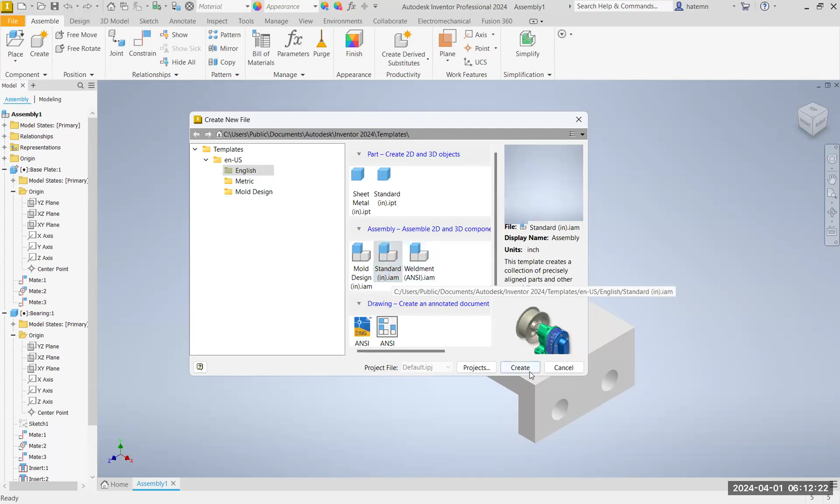So let's get started. The first thing you want to do is make sure you're in the correct template, and then you're going to choose Standard IAM, and this is an assembly.

So we'll select Create, and the first thing you'll notice is there's nothing on the screen. So what we're going to do is we created these parts earlier, and we're now going to take these individual parts and assemble them together.

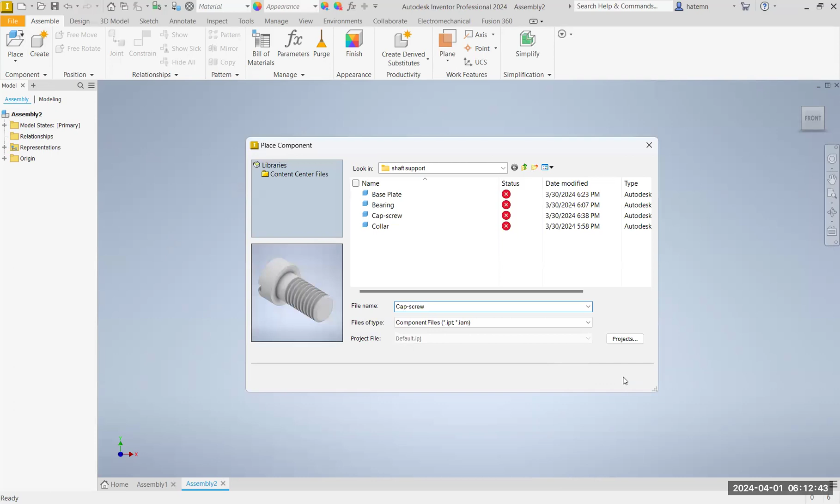So let's go ahead and start with our first item. The first thing that we want to select, actually let's hit cancel here, is when we're looking at our assembly, this is our base item. So this is the first thing that we're going to put into our drawing.

So let's go ahead and choose Place, and let's try to find that base plate. Notice when I select it, you'll see an image here. We're going to go ahead and hit Open, and I'm going to change it to isometric so that we can see our part as we place it.

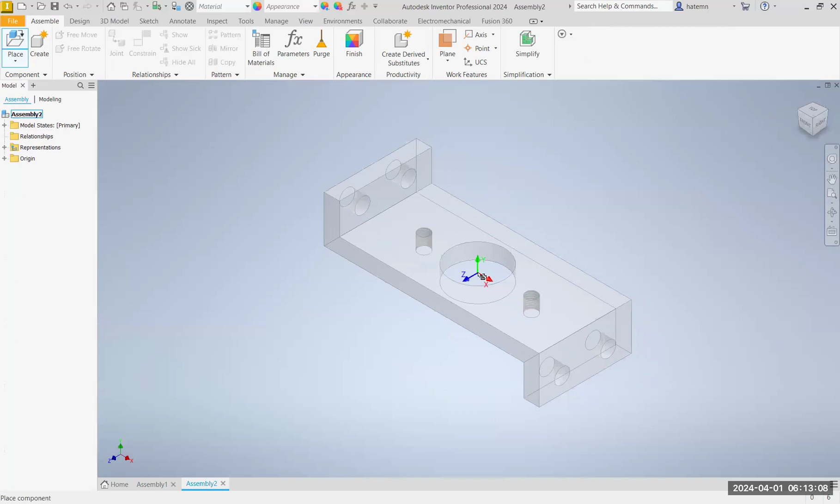The first thing that you want to do is right click, and you're going to place it grounded at origin. Notice I could place multiple items. I'm just going to hit right click and hit OK.

Now, when this is grounded, I want you to notice that it cannot move. It is set in place. And if I come over here to my base plate and right click, notice there's a check by Grounded, which means that this is the base feature. It's grounded in this location, so it's not going to have any degrees of freedom. Degrees of freedom are going to make sense here in a moment.

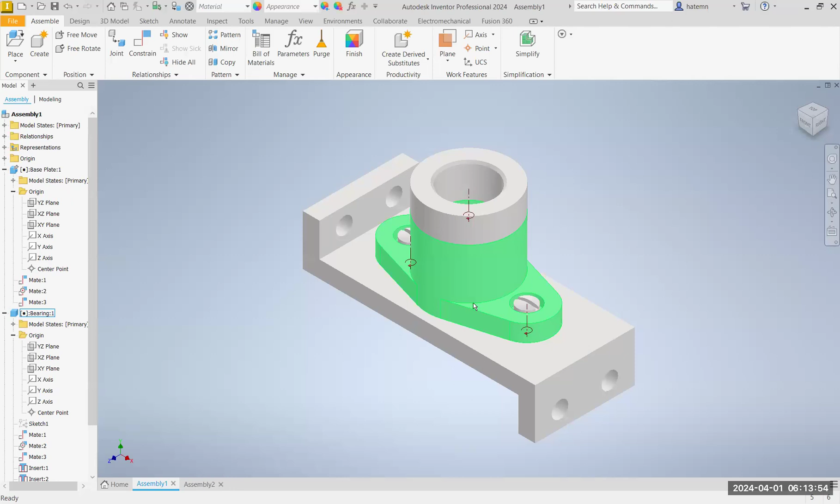So the next piece that we're going to go ahead and place when we're looking at this is this bearing here. Because that's the next piece that would logically be set on this base plate before we would put the collar and obviously the cap screws.

So we're going to go back to this assembly. We're going to go to Place, and we're going to select our bearing. And again, you'll see it right here, and select Open.

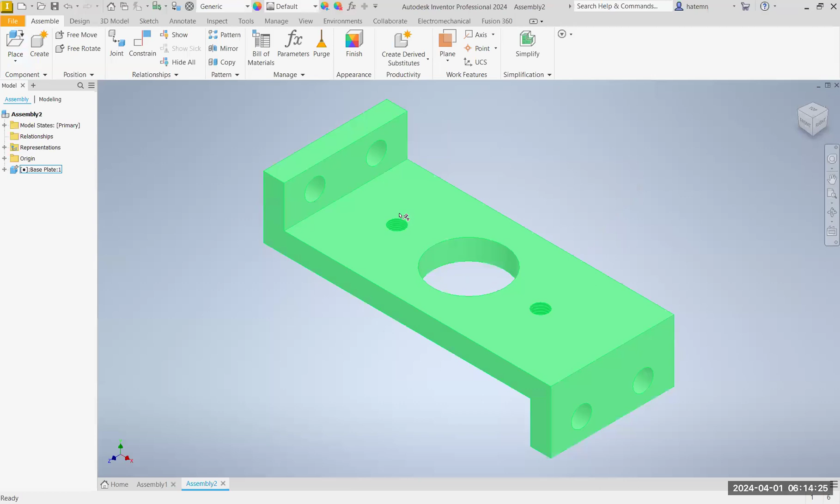So this time, instead of right clicking and just hitting Grounded, we're going to right click and just hit OK. Because what that allows us to do... oops, did I not click the screen first? Try that one more time. There we go. And we'll right click and hit OK.

So what that allows us to do is put this piece in. But right now, as you can see, this one I can freely move anywhere on my screen. And that's called degrees of freedom.

So we're going to go to this view, and we're going to turn on our degrees of freedom, this little button here. And notice that each one of these axes is green. So what it's telling us is that this does not have any constraints to keep it from moving up, down, right, left, and rotating it.

So to put these two together, we're going to create a relationship between our base piece and our bearing, and it's called a constrain. So we'll go ahead and select Constrain.

And you do want to watch, actually the video I will place after, but you do want to watch the assembly videos, and that's just going to give you basics of what each one of these types mean. In this video, we're just actually assembling the part.

So the first thing we want to do is we're going to mate these two pieces, and we're going to mate them. Notice here in the solutions, we have two different options where the two arrows are going to be opposing, or flush, where the two arrows would be aligned in the same direction. We're going to leave it as a mate.

So we're going to select the base feature, and notice that my arrow is located in the up direction. Then I'm going to rotate this, and I'm going to choose the base, or the bottom of the bearing, and notice that the arrow is moving in the opposite direction.

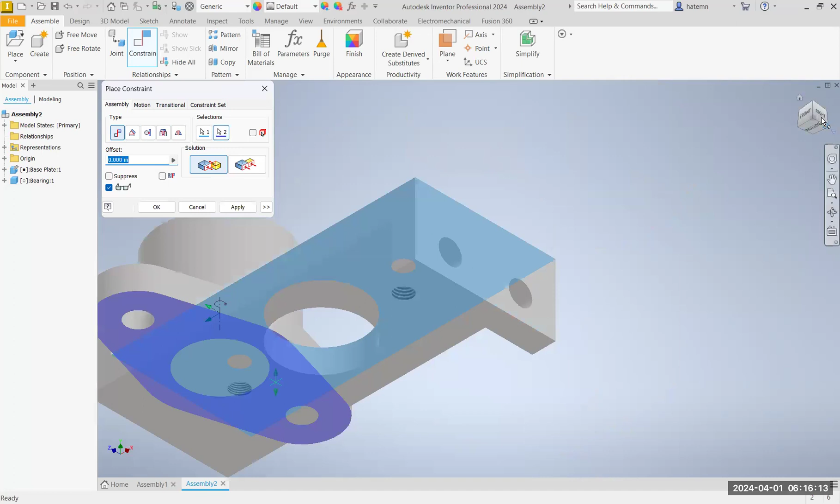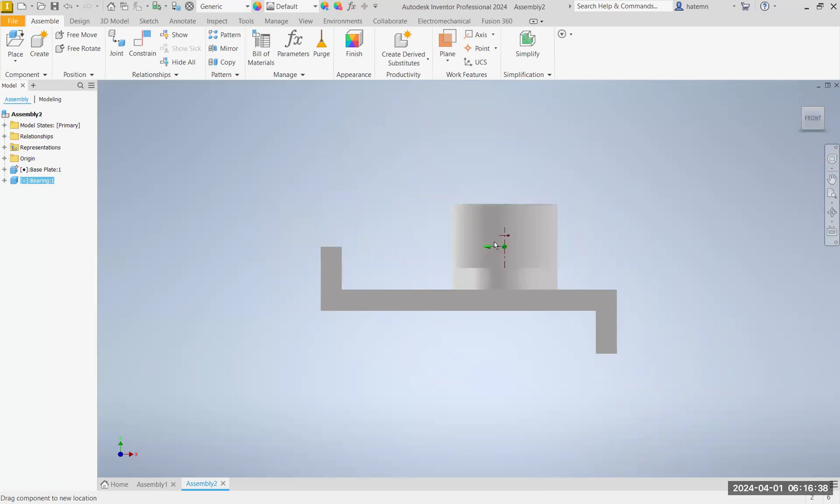So when I do that, if I hit apply, I'm going to go ahead and hit cancel. Notice that now this feature is attached to the surface of this piece. Now it's attached based off of the plane, not based off of the actual physical piece. So if I look at this from the front view, it no longer goes up and down because I constrained those two surfaces in a mate. But I can still move it side to side, and I can also rotate it.

So that's why it's important to turn on this degrees of freedom, especially when you're learning how to place these parts, because you want to make sure you're placing them the right way. Otherwise, you're not going to get these assembly models to look the correct way.

You know, things may be rotated or turned the opposite direction. So the next thing we want to do is we're not done creating these constraints with this part, okay? We're going to go back to our constraint, and we're still going to leave it with a mate and a mate solution here. And now we're going to mate the axes of these two holes.

So again, if I go to this hole here, I want to make sure I select the axis. Get close there, keep bumping my hand. There we go. And then I want to select the axis of the center of this hole as well. So see how we have that axis there. And now we'll go ahead and hit apply.

And notice, I'm going to hit cancel. Notice now it's constrained not just to the face and the bottom of the face of the bearing, but it's also attached to this axis in that mate command. See how we can still move it though. So we still have a degree of freedom we have to lock into place.

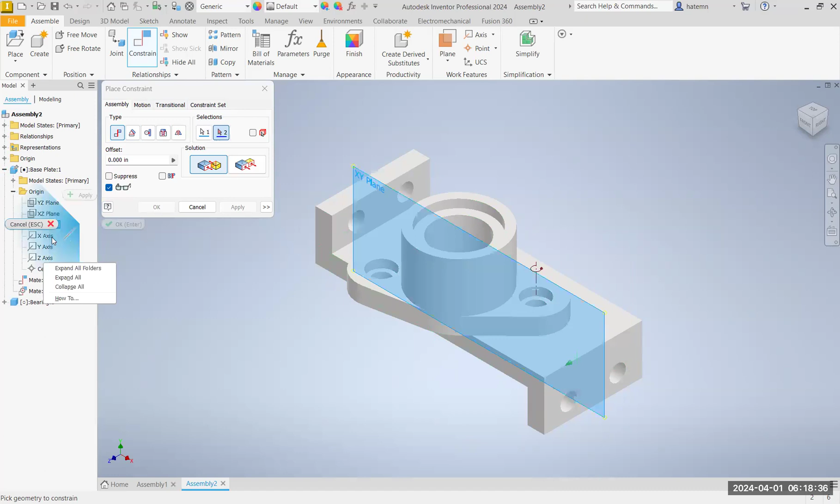All right, so we'll go ahead and turn our constraints on. And one thing I wanted to show you in this way is you don't have to just pick components of your parts. You can also pick planes of your parts. So for example, if I have this plane, let's make it visible. Let's cancel out of here. We're going to make this plane visible.

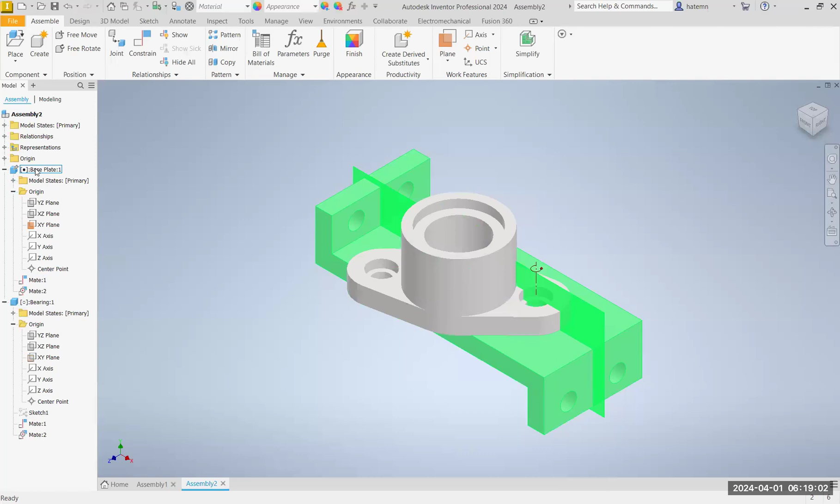And that is the vertical plane in my base. Then I'm going to go down to my model here, and I'm going to open up my second piece. Notice that my base plate is above because it was set first. My bearing is second because it was placed second. So you'll still use this model tree to be able to manipulate these parts.

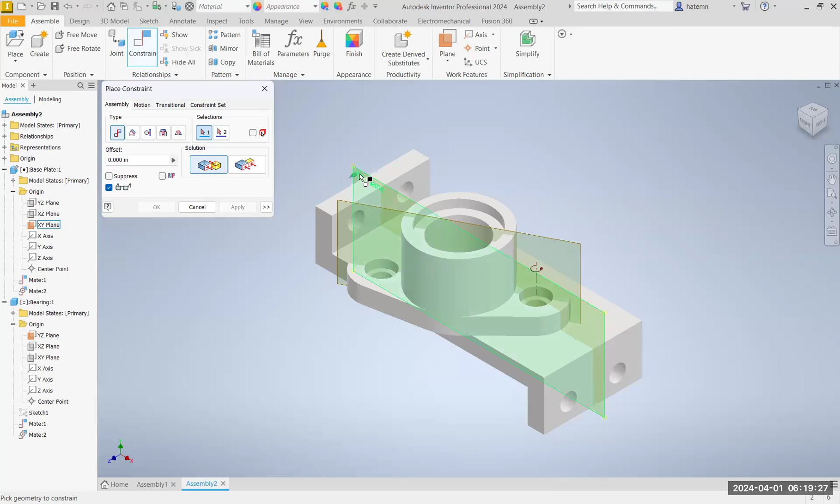So let's go ahead and turn the YZ on. So what I can also do is create this constraint using these two planes as well. We're going to still keep it as a mate and a mate, but this time I'm going to choose my plane. Notice that my arrow on my plane is moving this way, and my arrow on my plane is moving that way.

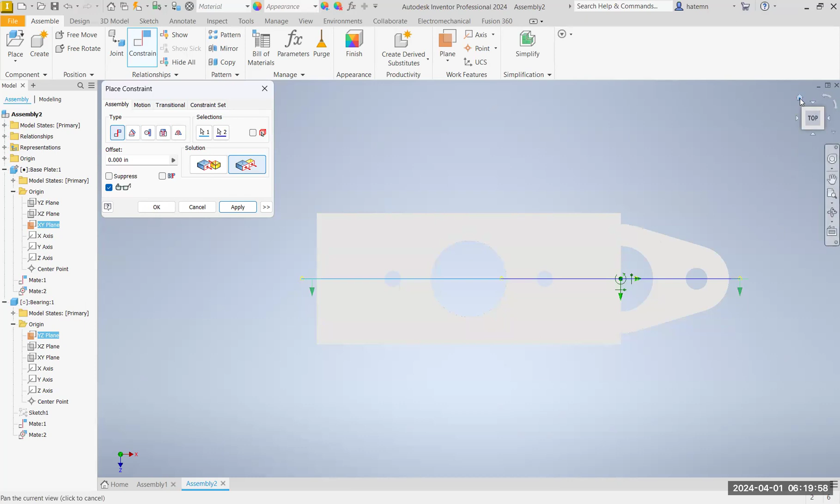So again, they're mating flush. Let's look at it from the front. So this plane is mated to this plane. See, this plane for my base plate and the plane from my bearing. If I chose flush, notice the two arrows are going in the same direction, but then look at how it's located here. So depending on how you have yours laid out and which hole you align first, you may have to manipulate it to flush versus mate.

And once that's located, we're going to go ahead and hit apply, and then I'll hit cancel. Now notice, let's go ahead and take the visibility off here. And notice now we don't have any degrees of freedom. So this is fully locked in place.

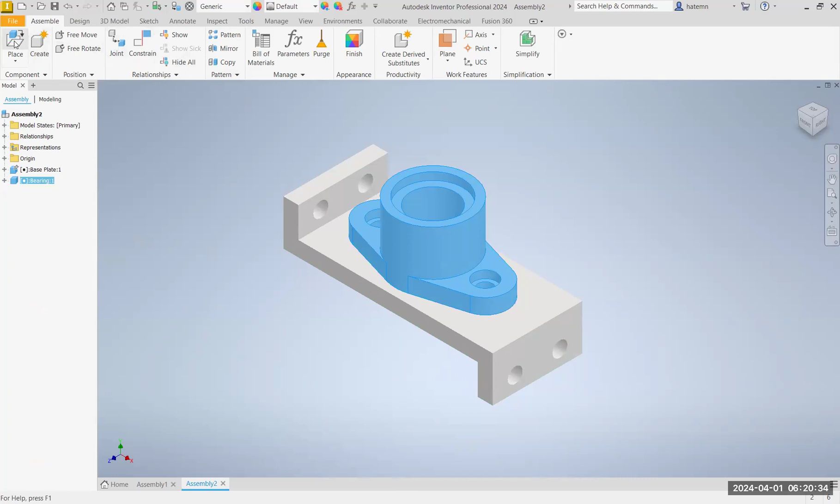All right, so now let's go ahead and choose our next piece, which is going to be this collar. I'm going to go ahead and go to place, and let's choose collar. That's this piece here.

I'm going to go ahead and click on my screen, right click, and select OK.

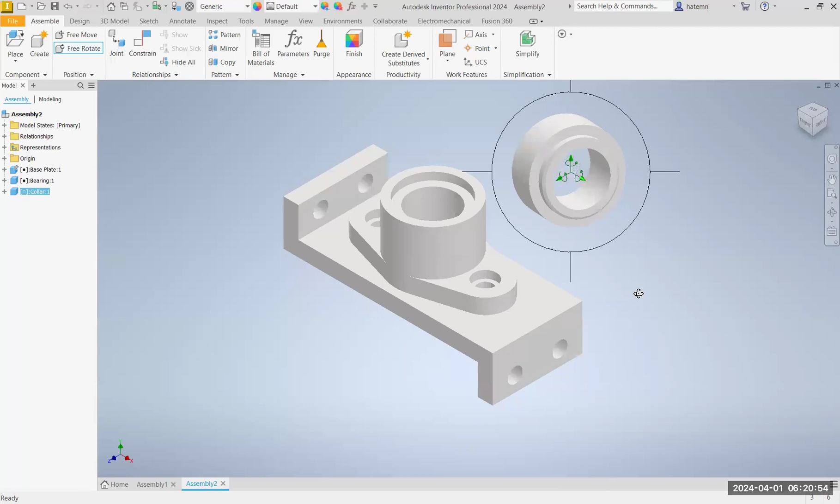With this piece highlighted, I can do a free rotate, which means I can rotate this in any direction. If these two pieces are different on these two sides, it's easier to visualize. We're placing the collar in so that this bump out fits right into place of this bearing. You can easily turn these around and then just take your free rotate off—look how it's just moving. Sometimes when you're trying to figure out how to put these together, you may need to manipulate a part. It makes it a little bit easier.

Now we're going to go to constrain, and the next one we're going to work with is insert, because we're going to insert this collar into this piece here. I'm going to choose—notice when I get close, I'm choosing this inside circle of my collar, then the inside circle of my bearing. Let's hit apply and see how these now attach together. If I look at it from the front, they're attached by the two circles that I chose.

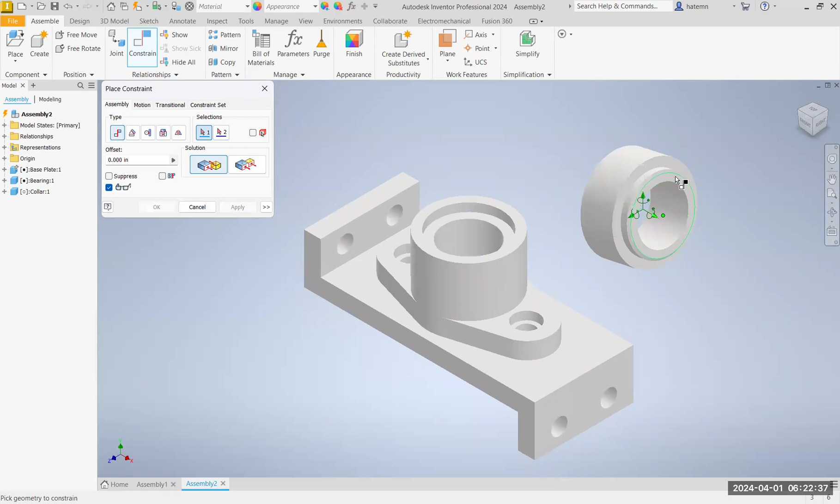So in contrast, let's hit undo. Let's say I came into my constraint, did my insert, and accidentally chose this circle on the chamfer, then chose my inside piece. Now that chamfer is going to be selected—let's try that again. Let's choose this outside one, and our piece here. Notice that now the location isn't quite what we wanted because of how I chose my piece. I didn't choose the correct circle.

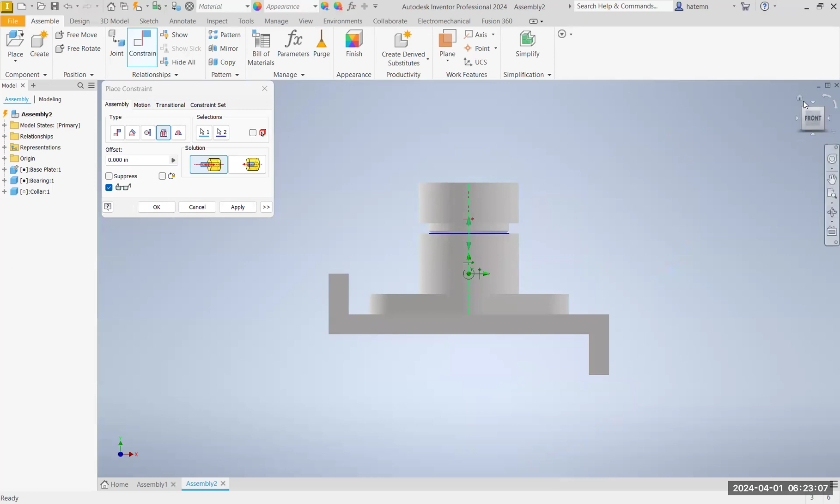Again, we want to go to our insert. Let's say we selected this top circle—so they're going to be inserted along the axes, but notice it's the top of my collar and the top of my bearing, because those were the circles I chose. Let's try that one more time, making sure we choose insert. So we're choosing this circular feature here—there's the axes—and this circular feature here. Those are what's going to mate along this axis.

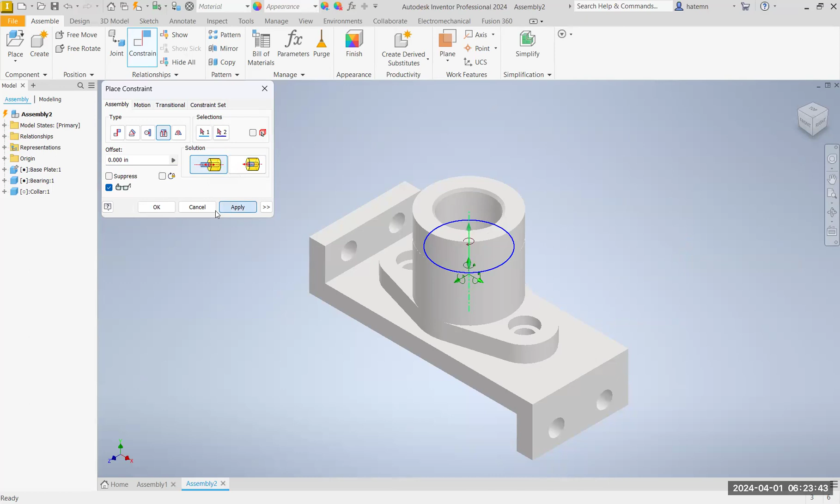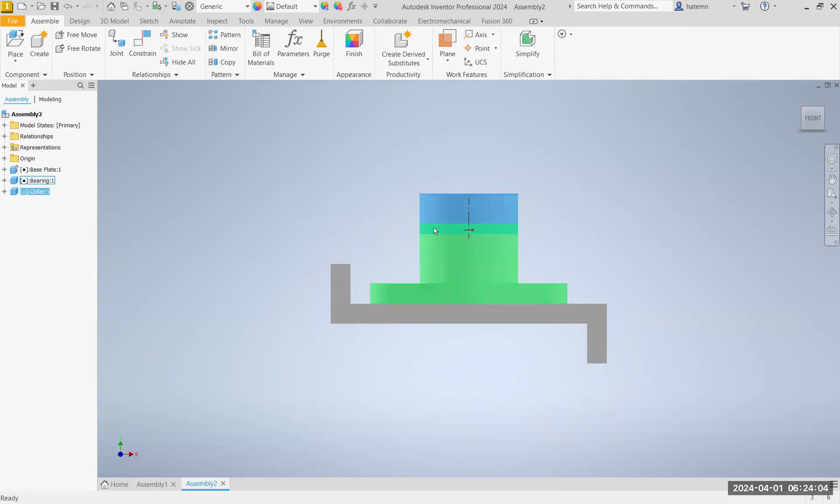Look at my arrows—this arrow is going down, this arrow is going up. I can't select this because if I choose aligned, the arrows will go in the same location, so we want to leave it in the first option here. Go ahead and select apply. Now notice the only thing you can still do is spin—you can see it's spinning. We want to double check our constraint here, and you can see that the little bump out is situated inside of our part.

The next thing we're going to do is place our cap screw. We're going to select it and you'll be able to see it here, and this time we're actually going to put two. I'm going to click twice because I need two of them, so you don't have to place them in individually. Notice cap screw one, cap screw two—when I put my cursor over the top, they highlight so you can always know which ones you're working with.

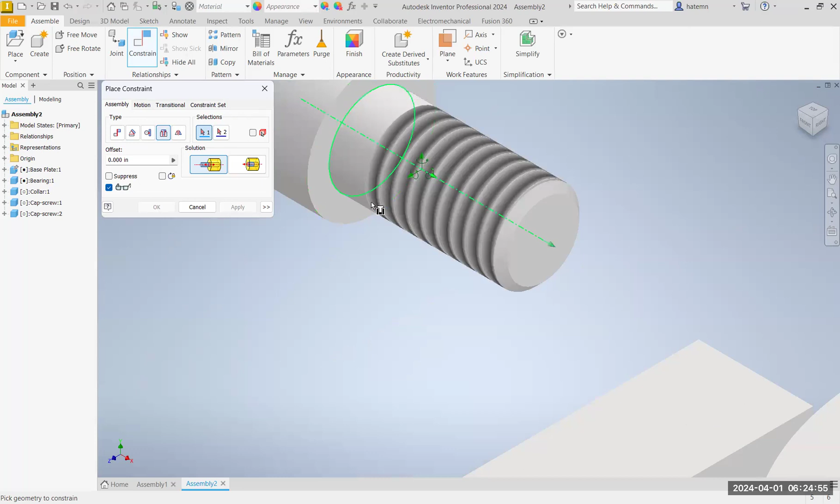We're going to go to our constrain, do our insert again, and I'm going to choose the inside circle. You want to be careful which one you're choosing, though it doesn't really matter in this situation because they're on the same plane. Either one would work. There's our axes, and we're going to insert it into this piece here. We'll hit apply, and do the same thing to this one as well, then hit apply and cancel.

Again, you can see the only degree of freedom you have left is the rotation of the screws, but they can't move up, down, right, or left. We're okay with them rotating because they would actually rotate in real life. If you want to line them up, you can. And that is how you assemble these components.